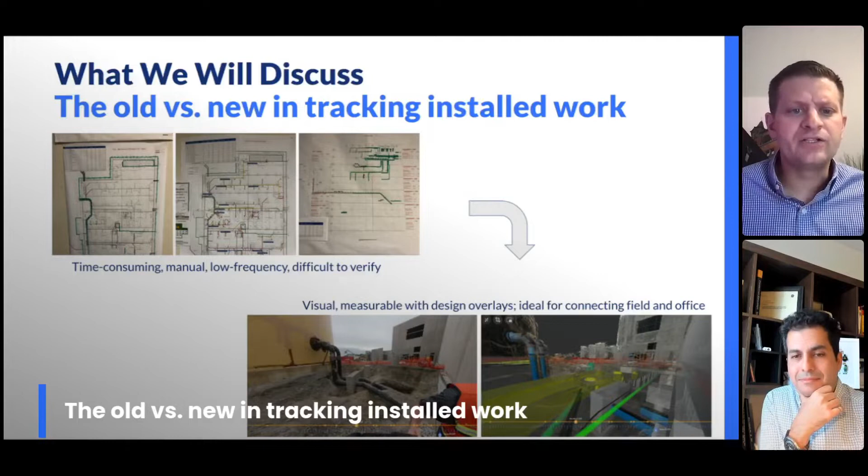Steve, I'm sure you can share a lot with us on this topic. What are your thoughts? When I first got out of high school, I was a laborer for a GC, actually working in the field. One of the things I noticed early on is, okay, what am I working on today? Where's the progress? Where do you need me, boss? That's kind of that top part of the slide, and it's still quite evident in the market today as we work with customers in the field. They're experiencing the same challenges, where it's harder to track what the different colors mean or what's happening. Jumping into seeing something in 3D is an extremely powerful tool to use as you track progress and as-builting.

It's fascinating, Steve. There used to be a time I worked for a construction management company, and we had about 1,500 projects a year, one of the larger top 5 ENR companies. At some point I was in charge of looking at how we conduct our daily construction reporting, and it was a fascinating exercise for me.

I came across a few facts that are truly a basis for looking at reality capture as an enablement for that process. We had 1 or 2 field engineers across every one of our job sites, and they were simply in charge of capturing daily reports. We had subs coming into the trailer, leaving a stack of papers on top of one another, and this field engineer sits down with so much paperwork that you probably don't even walk the site. You sit down and manually enter them back into some electronic daily log system. Why? Because across every one of our projects we had this requirement of submitting these reports anyway. Did we ever trust that information? Unfortunately, I have to say no.

We used to wait an entire week for coordination to happen, and then everyone would walk into the room, color coding 2D drawings. Now fast forward to today, imagine this is a data center—what is it, like $5 million a day of work that we do every day? Imagine waiting 5 days to learn that the picture of reality is different from what these guys actually reported to you, because sometimes we drive risk based on our perception, as opposed to where risk is truly happening on a project.

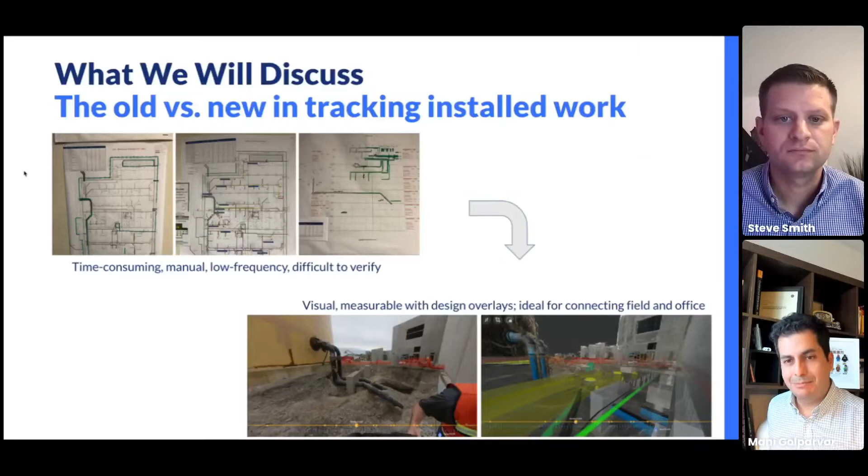Absolutely. And while we've been focusing on construction, we've also come across challenges with our existing assets. It was really interesting for us in the context of Reconstruct—this was sort of inbound for us. In our early days we were approached with our reality mapping capabilities and the desire of people wanting to create as-built documentation for them, for a majority of these assets, whether it's a bridge, tunnel, or all the way down to a small multi-site job like a convenience store next to you.

We just don't have any as-built documentation at all. So when we want to renovate them, we want to do expansion, we want to look into purely condition assessment, or create a basis through replica, digital twin that can be used for inspection purposes. We just don't even have that data.

And it's been fascinating to see some of these capture devices in terms of how they're supporting and enabling remote inspection. And of course, the first step toward that is let's go ahead and document the existing assets as fast as we can, as convenient as we can, and as safe as we can, because nobody wants to get into some of these challenges that we see.

I don't know if you have anything you want to be adding, Steve. No, yeah, and I think that the other piece, particularly if you're doing a physical asset inspection or a job walk, is to be able to use something like Reconstruct, to be able to add a geo-tagged element and say, hey, this is where I was at, this is what happened. You can just basically say, this is where I was working.

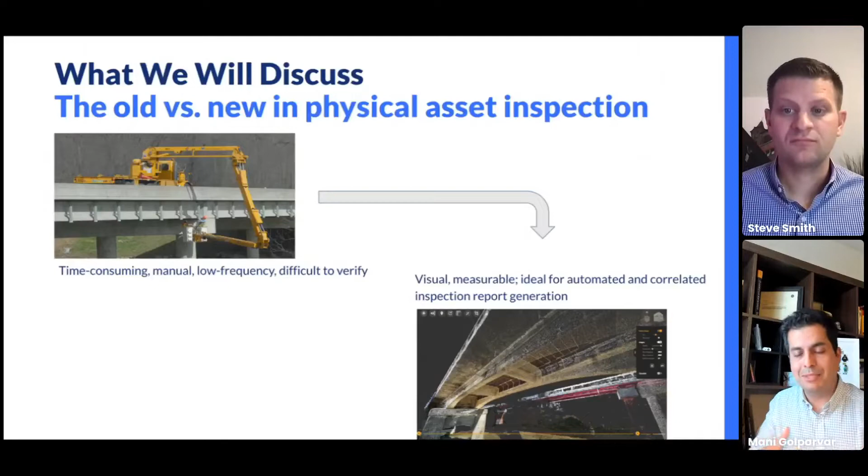Now you go and start inspecting, and of course there will be degradation, defects, spalling, and whatnot. And you want to correlate them. You want to say, how does this evolve over time? And there's just no basis for that. And of course, now it begs a question: what should we use as the base of that documentation?

Maybe you want to kick this off. Sure. So as we think about reality capture, there's a host of options. Everything from high definition laser scanning, almost surveyor level tools that can very accurately tie things back to project control, back to survey benchmarks. Those are all really, I guess, on the if there's a tool side and an instrument side on the board, the tool side is closer to the right, instrument side would be closer to the left. And there are times when you would need either or both.

I think that what we're seeing, just like we see broadband speeds increasing across time and space, the same thing is happening with reality capture data, where we're starting to see needs increase that are pushing use cases towards simple use cases as opposed to hyper complex. There will always be a need for that.

Like if you're doing floor flatness, you need something much more accurate. If you're doing progress scanning and appending updated project information, issue tracking, that is very powerful when you can simply have an operator walk a job site with a 360 camera and also be in this reality capture world where you can geospatially reference projects. So it's interesting. The cool thing I love about Reconstruct is the ability to kind of navigate all of these tools, right? You've got the terrestrial based ones like the 360 camera and the laser scanner.

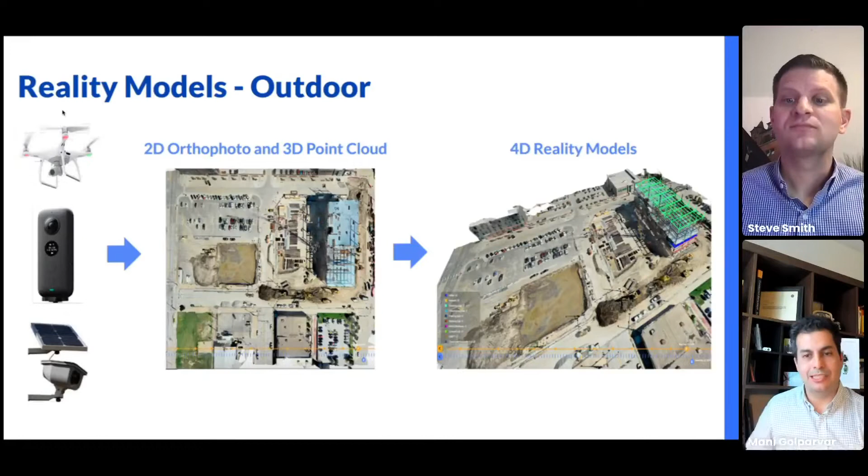Indoor has also been really fascinating. When we started looking into this space, in early days the alternatives were purely reality capture - pinning images against the floor plan. Of course, technology has evolved, and there are a couple of vendors that automatically map video frames against the floor plan.

For us, we really wanted to make sure we offer the same experience across the data, no matter what device is used for capture. So we worked on this capability of automatically generating point clouds, automatically generating mesh models, and automatically generating floor plans.

It was so fascinating - the floor plan conversation in early days was primarily about basis of navigation. We want to make sure people can make sense of where they are. So if you're working in a healthcare facility and you did a video walk, and you didn't even have a 2D design available, at least we can show you where you are in the space. It was truly an as-built 2D representation.

Of course, it begged the question, can we also map that against a Bluebeam 2D PDF? There are two ways of thinking about it. For us, we cater to many different types of jobs. Sometimes design is created after the reality capture, and sometimes design is already available to the team doing the capture.

So we worked on two different workflows. One is you upload it to the drawing simply on your cell phone device - you get access to our mobile app, you can see where you are, and you hit start and hit end. The video automatically goes into the server, gets processed, and without needing to highlight where you started and ended, through a number of AI algorithms, we can automatically position the as-built.

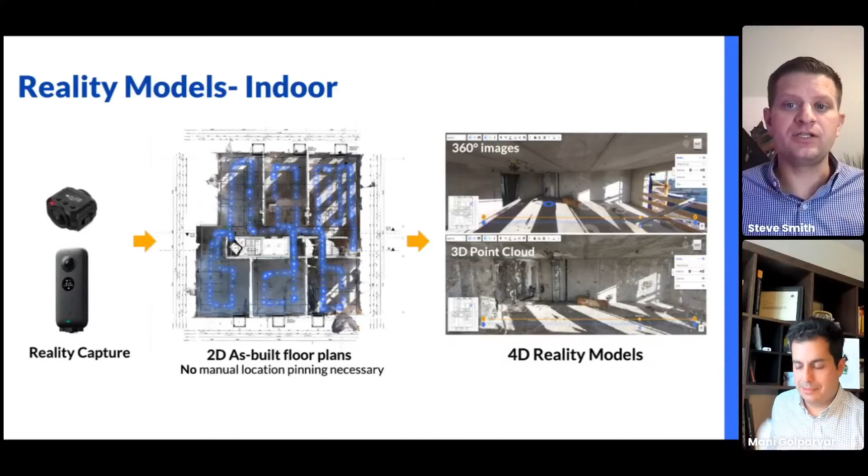So all of these things are kind of coming out as you do your as-builting. And this is where these reality models, even lightweight reality models, have immense value. We're not talking about sub-centimeter, millimeter accuracy. We're talking about this wall is there, this pillar is there, this bump out is here, I didn't notice that before. All of that stuff is actionable and important to know.

Absolutely. And of course, the complementary skill set of being able to bring that laser scan or structured light data right into the platform. And of course, there's a huge set of projects that are already benefiting from it. And we see a number of pain points associated with that.

I'm sure, Steve, you also relate to this. One of which is, all right, I did this amazing laser scan capture at the highest level of accuracy that was possible with the device. And you come back and say, how am I going to be able to display that data? Then you go back and look into subsampling, and then, how am I going to be sharing that data? Unfortunately, we see practices of putting that data on an SD card, or an external hard drive, and finding a way that maybe you'd be able to upload that data. And then you don't know if the designer or construction team would be able to go beyond that specific use case of the scan.

Many times we do these scans for, let's say, flatness measurement, as we discussed earlier. But if you're the superintendent on the job, you can also take advantage of the same data and use that as a base for your coordination. The fact that it's not easily shareable has been one of our motives to make sure that we can load that data in and easily generate it.

So this example you see is actually a funny one. It's a hotel that this fellow used structured light - actually a laser scanning device - to do a quick capture of the space. It shows you what you can achieve with this device on a reflective surface. The point being that there are ways you can leverage this capability in any type of space.

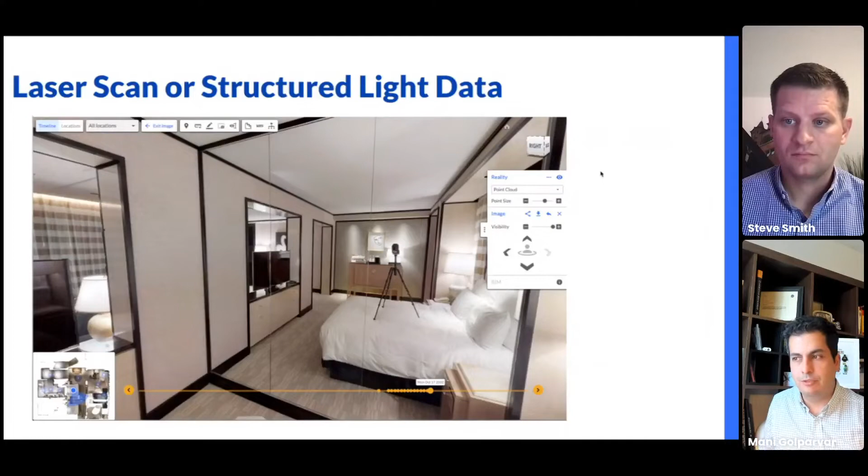So for us, it's not just been the 360 photos, but also pinning images, which is what superintendents and a lot of PMs love—the simplicity of just walking in and wanting to take a picture.

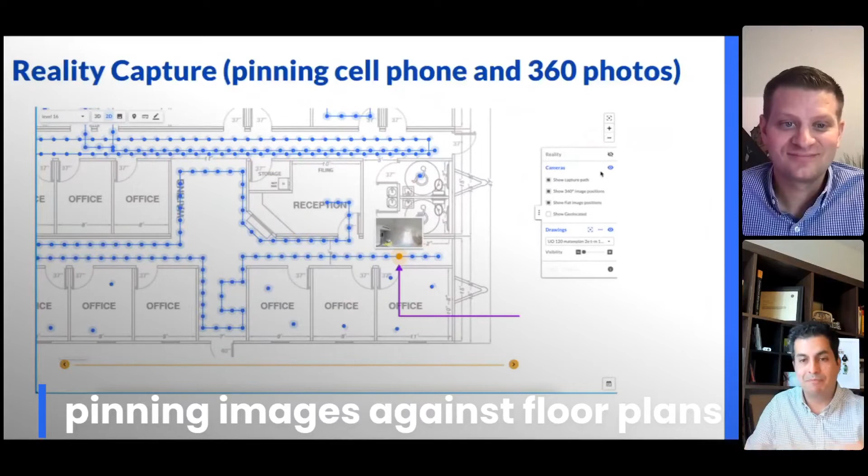One was making sure the conventional 360 mapping, which Bluebeam also supports, works—you'll be able to bring 360 images and map them against the floor plan. But then the other piece was democratizing the capture. You're going to do your reality capture, even in progress monitoring, once a week.

But there are many moments when subs want to take pictures. Your field engineers are walking around and they see a defect, a quality item, or simply an RFI, and they want to take that picture. Otherwise you may end up putting it in a completely different platform. So the idea was to make sure that, going back to that single source of truth, you bring that in—it sits in the same coordinate system.

The example I have here is a floor plan, but this can also be an ortho photo generated from a 360, and people love it. That example for a video was really eye-opening for us. There was documentation being done for a TI job, and they obviously walked quickly with a video camera and did the entire capture, then came back and said, hey, can we go back and take a few more photos?

And of course, if you load that ortho photo into your cell phone app—our app, Reconstruct—you'll be able to go back to the place and say, I'm going to add one more picture here, add one more picture there. And everyone gets live visibility into those small areas that need to be updated.

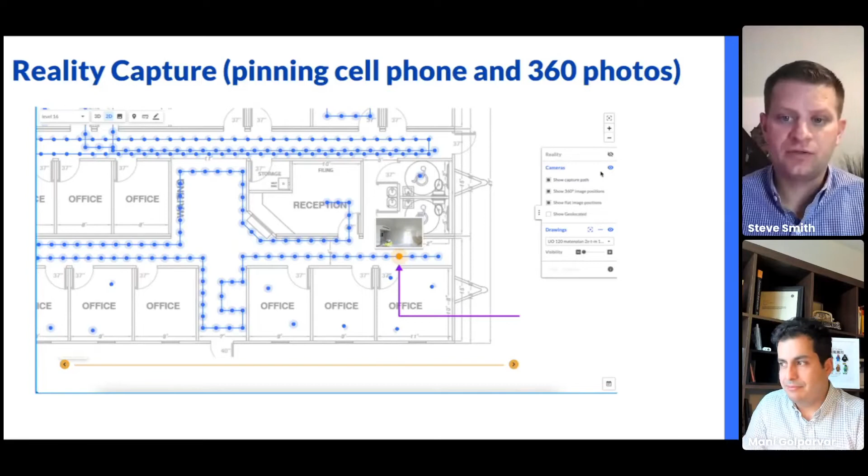I don't know if you have any thoughts you want to share on this. No, I think this idea of being able to tag issues is critical—definitely part of the whole process of being able to visualize things in space.

Now we get into the fun piece of it: how do we tie all of them together so we can generate 4D reality, 4D meaning time, or how do we design the schedule and bring them into alignment? Maybe you want to start on this one. Yeah, this is really a fascinating area where there's definitely, we'll just call it, a target-rich environment.

One of the challenges we're seeing in construction globally, not just here in the United States, is how to get construction people in the field and everywhere thinking in terms of models in 3D versus 2D. This is one way to make that jump easier with the simple shareability of 3D data. Because clearly we have all this really rich BIM data, and that's kind of where reality capture, 3D space with lidar and photogrammetry resides. But sometimes that ability to consume becomes a problem, or even to visualize and understand. Anyone who's jumped into a model has asked, what am I looking at? Sometimes it opens up and you're looking at the corner of something, like it's only 2 inches off the ground. Whereas that 2D view is maybe a little easier to communicate. So this simple, lightweight, shareable, browser-based approach makes that barrier to entry much easier.

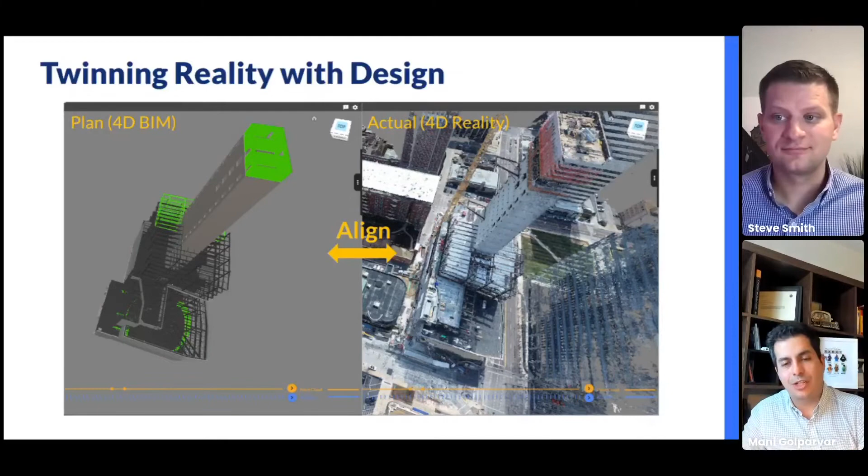So for us it was really important to find a way to easily let people bring their reality capture and align it against whatever coordinate system they want, whether or not it's been properly mapped into a GIS system. So we worked on a number of techniques. One is, when you set up your project, you can bring the 3D models from the Nemetschek platform, then bring the Bluebeam 2D drawings, the 2D PDFs, and interactively place them in the right place. So now you have a stack of 2Ds against a 3D model. As you perform your reality captures, they're automatically aligned against the 2D drawings, and as a result automatically mapped against the BIM. Over time, every reality map is mapped against the previous one. So you create this time machine that always gives you that desire of seeing design or plan versus reality. This coordinate system has been a fascinating topic to make sure it scales across different types of projects.

All right, now that we've looked into the application of this, people say, well, what are the top use cases you always see from contrasting your design against the reality?

I shared that example of a large number of projects we used to do at that construction company, and the desire of doing progress tracking. You can never do progress tracking without thinking about quality. You do not approve progress unless the work in the field has actually achieved the quality defined in the specification of the project, nothing beyond that. And that means design versus reality. Whatever design shows, whatever we've agreed to design, we can all make the argument that we put these stamps on the 2D and that's our IFC issued for construction, but you have to marry that against the reality.

But you see, sometimes we just always have these coordination and communication issues. Somewhere, somehow, communication broke and the team wasn't informed that they have to follow a change in the design. At least you can start preventing these before they escalate and grow, and you'd be able to start addressing them.

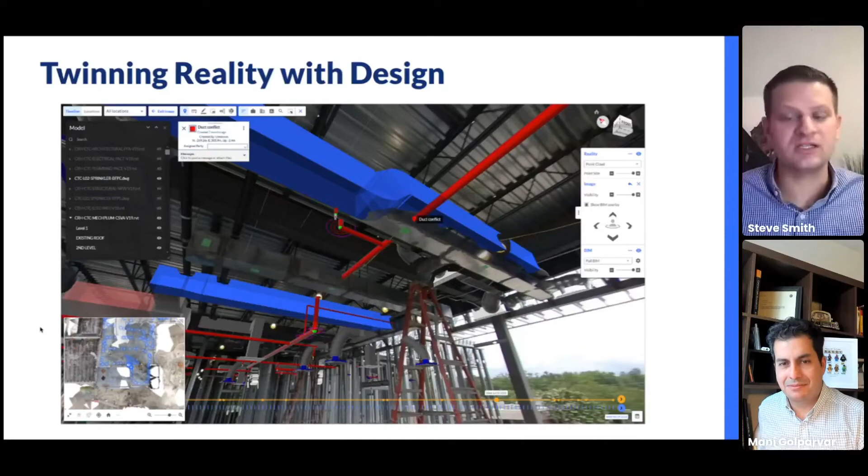And it's not to say that the MEP even did the wrong thing. That happens too, where there might be different constraints, or the model might have changed. So what we're seeing here isn't necessarily - it may be in this specific example, but it could be that the model doesn't reflect the new reality that the change order was already approved. So this opens the ability to just have a conversation around what is being shown in reality versus the design. It's a great conversation starter, and that's what construction's all about - it's about conversations and collaboration.

Absolutely. And autonomy, another interesting topic. When I started working on reality mapping as a technology, mostly from a scientific perspective, many years ago, this notion of autonomy wasn't really a thing. At the time, what I had to worry about is whether people even have consumer-grade digital cameras they can take pictures with. Fast forward, there's been a lot of transformation in that space, starting with drones and ground robots.

First exposure that we had as a company to ground robots, as unusual as it may sound, goes back to 2015. We started working on the Sacramento Kings Stadium project prior to establishing our company. With the team we were working with, they had just been exposed to this problem of flying a drone, and they were really excited. But this was a stadium project, a large site, and that meant a lot of work. Going back to this notion of understaffed teams, they really wanted to see if they could actually use a ground robot. It was really eye-opening to me that when people are exposed to these pain points, this notion of leveraging a robotic platform as a co-worker, as an enabler, starts growing. And of course, you see all these kinds of pictures.

These are all inspection - like the fellow who's crawling into the plenum on the left side, or our inspectors and engineers putting themselves in all kinds of safety risks just doing inspection on the building facade, under the bridge deck, or the side of the bridge. No longer needs to be that way. We have complementary technology that can enable them so they can stay within a more safe environment, and only get engaged in these activities when truly an extra step is necessary.

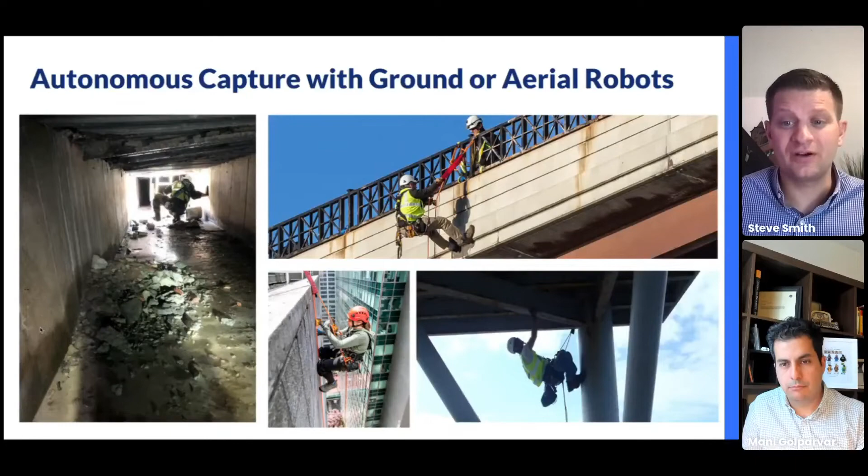Yeah, and the proliferation of autonomy in reality capture is going to continue. There's many platforms, there's a lot of buzz around this space, and I see continued innovation around how these autonomous solutions will start to capture and even just publish without much human interaction different deliverables on a daily or regular basis.

Absolutely. So it leads us to bring it back home. We are in the business of managing our teams, managing our people, so we can deliver our projects on time and on budget back to the owner. And of course, you want to generate some insight from the data and raise the question: is it going to be reactive? Is it going to be proactive?

So in early days, our focus was, all right, let's just go ahead and start helping folks communicate what has been done right and what is not done right, using visual color coding. Over time, even prior to starting Reconstruct, we learned that people already practice lean construction on job sites. The underlying promise with lean is to be more proactive, to create a reliable plan as opposed to reacting to it. So then we had to invent a completely new set of metrics that can highlight what the risk is in a form that is really, really easy to understand.

I mean, look, that picture you see on the right side, you have all the subs in the room, right? You cannot go deep on the technical side. What you want to do is get work done really, really fast, because every single person that showed up on the job site is busy. Not only do they have this project, they probably have a few other projects running simultaneously, and you want to get the message communicated to them immediately.

And what better than to say, hey, what is the purpose of this meeting? Coordination meeting. What is it that we're doing? Updating the plan. So let's look into risk, and let's look into what are the areas that are at risk for delay. This was really also interesting.

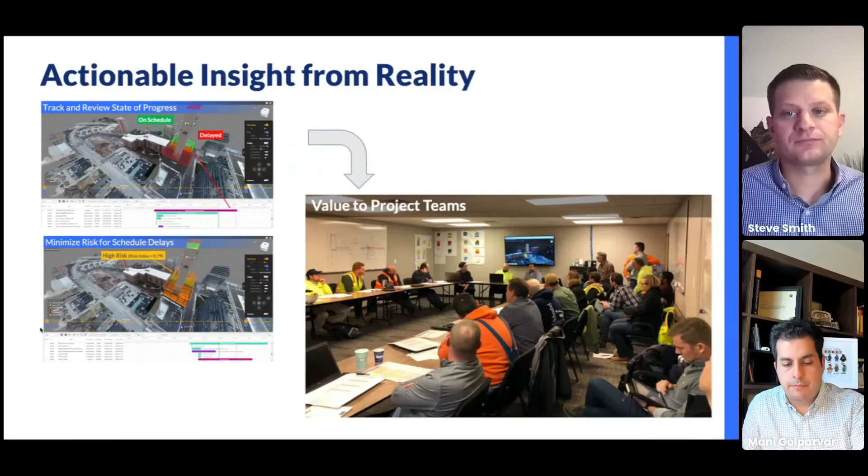Absolutely. It goes back to how we started, right? There are many of these conversations that are going to happen in the project. You may have to use a different tool for it, but you still want to have that one source of truth for all of it. And maybe you can look into it slightly differently - if you can help us map this out. Now we've learned that there's a bunch of different things that we can use. What is that process? Who should do what? Maybe you'll share some of your experience on that front.

The technology piece is rather the easier piece. Getting buy-in from everyone that there's value for them, and establishing a workflow that is repeatable on a weekly basis, whatever that cycle is for the job, becomes really important.

Which begs the question: how do you get that buy-in? You have to demonstrate value. When we work with different companies, sometimes even with the same company but different projects, they say, well, we want to see that ROI framework for the type of project we do. Sometimes they feel the type of project may make an impact, which is true. There's always some project-specific requirements that may potentially impact your ROI, but the basis of that is almost constant. The framework would remain pretty much the same.